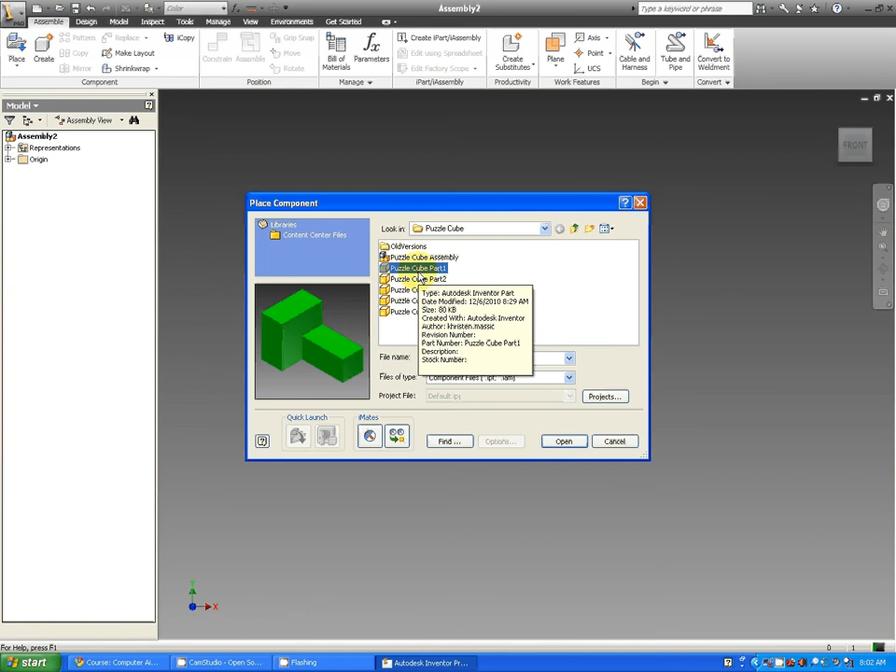I'm going to go into the upper left where it says Place Component, click on that, and select the first one. If you have all of them drawn already, you can hold down the Shift key and click the bottom one, and you get all of them in there.

Now when it comes in, you will have a dark set or a solid set, and those are the ones currently in the assembly. The clear or translucent ones are additional copies if we wanted more. If you hit escape, then it gets rid of those.

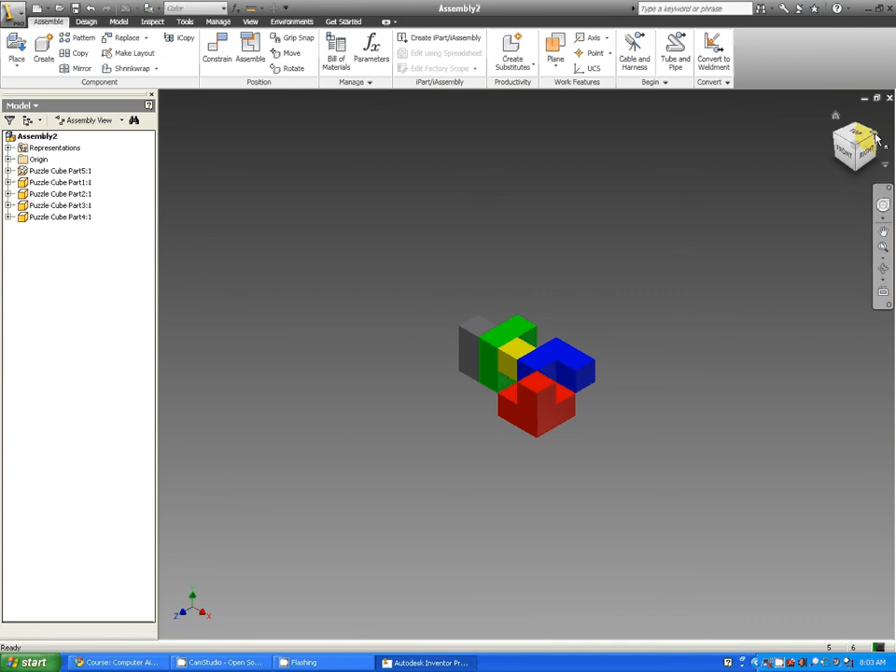So now I've got my parts. From that view, they looked like they were all attached, but I can see in here that they are not. Now if you look over on this left side, Puzzle Cube Part 5 has a little push pin on it. That means that one is not going to move—it's going to stay stationary.

So we want to see if we can hook all of our pieces to that piece. So we're going to do some assemblies right now.

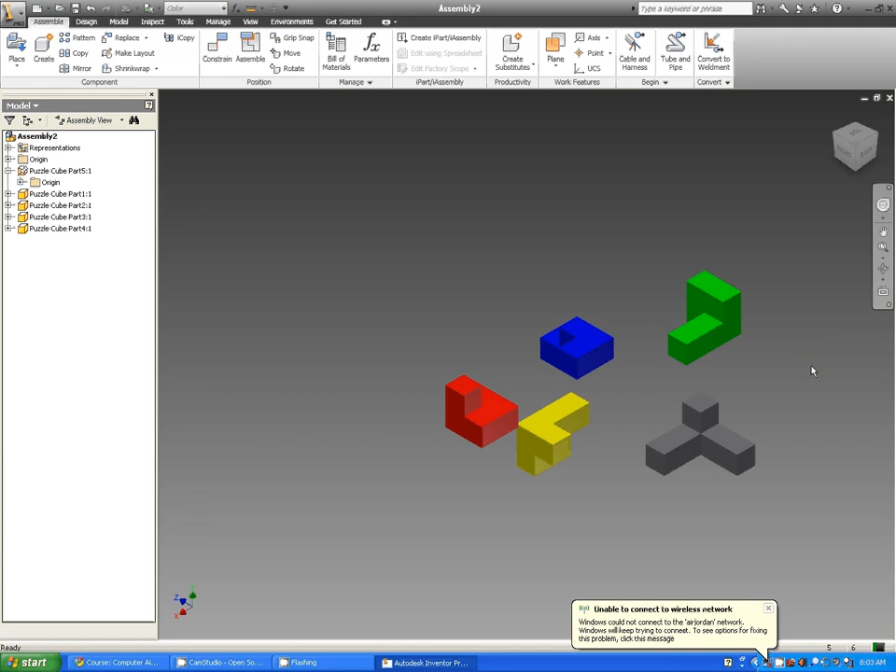The first thing we are going to do is constrain, and that's what actually gets things to hook together. You can rotate and move things, but I would try not to use the rotate button because sometimes it causes more problems than it helps.

So I'm going to do constrain, and if I have my 3D cube still in front of me, then I can look at this a little bit better. There are some more cubes up front if you need to recreate your cube so you can see what this is going to look like.

When you open up constrain, we've got our mate constraint, which has mate and flush. Mate is two faces that are touching each other, and flush is one right next to another. So I'm going to show you a couple of those.

We're going to go to flush, or mate first, and I'm going to say that I want the top of this one to hook into that one. So it actually automatically flipped it over.

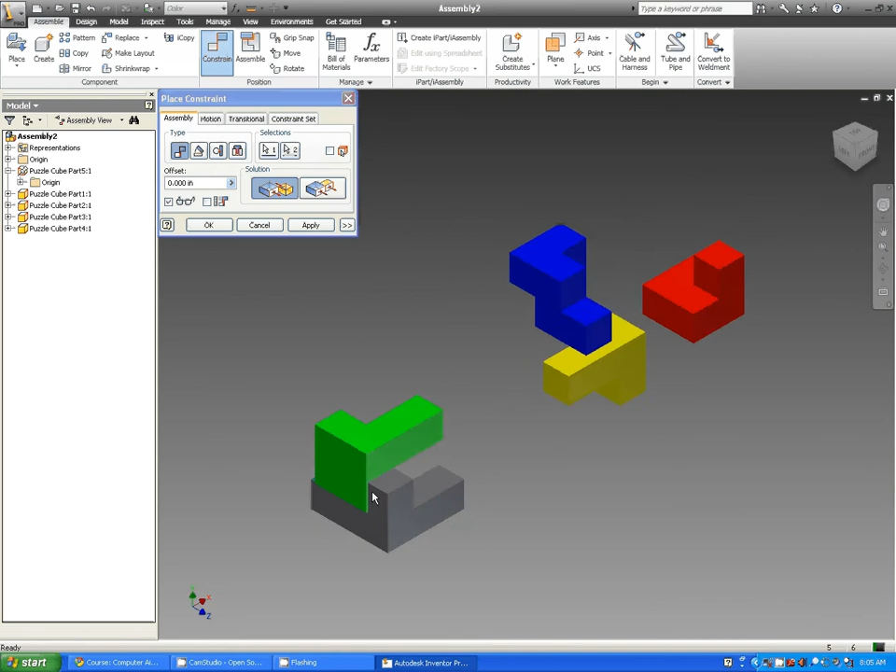But if I look at it a little bit closer, it looks like that part is not lined up and they're kind of going a little bit crazy—they are not where they are supposed to be. So I'm going to hit apply because I do want to accept that mate. That mate was good, but I want to make some of these flush.

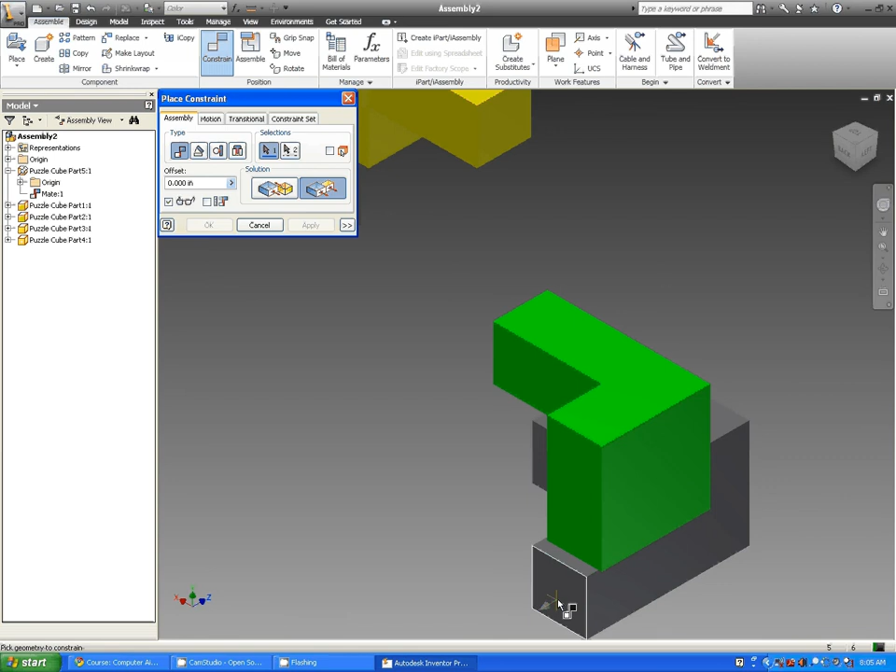So I'm going to click on this face and that face. And if I rotate it a little bit more, I can see from the inside that those two don't hook together. So I'm going to hit apply, and then I'm going to do a final mate there.

So you should have your parts and pieces hooking together the way that you want them to. Now sometimes you'll get an error that says you've over-constrained a piece.

If that happens, or if something really isn't working, the trick that I usually use is I'll come up here—let's see, this is Puzzle Cube Part 1—and I can tell that if I go over it with my mouse, it highlights it over on this left side. And it lists all the mates or constraints that I've already done.

If I right click and delete one of those, it didn't move my piece at all, but it made it so that those constraints are not existing anymore, and so you could move it. So you could try doing some more constraints or mates to see if you can get it to do what you want it to do.

Ask your neighbors for help if you're having problems actually constraining things together, and sometimes it's easier to remove that part—delete the part and then bring it back in. You're not actually deleting it, you're just deleting it from your assembly.